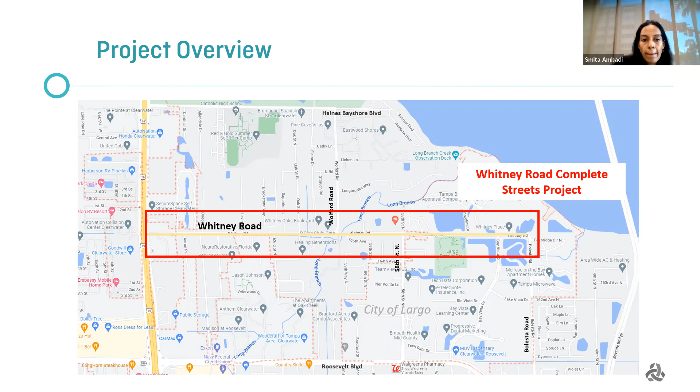There are a few ongoing projects within the study area. Can you move on to the next slide? So there are a few ongoing projects. We have the Duke Energy Trail project that intersects Whitney Road.

We also have the Whitney Road Wolford Road intersection improvements project. Both of these projects are being led by Pinellas County's Public Works Department. The Wolford Road project extends from North Oak Street to Hidden Springs. This project precedes ours, so it started a while ago, and we've already completed the public outreach and identified improvements for this stretch. Since this project is ahead of us and the improvements have already been identified, for the purpose of our project we will be focusing on the rest of the corridor, basically west of North Oak Street and east of Hidden Springs.

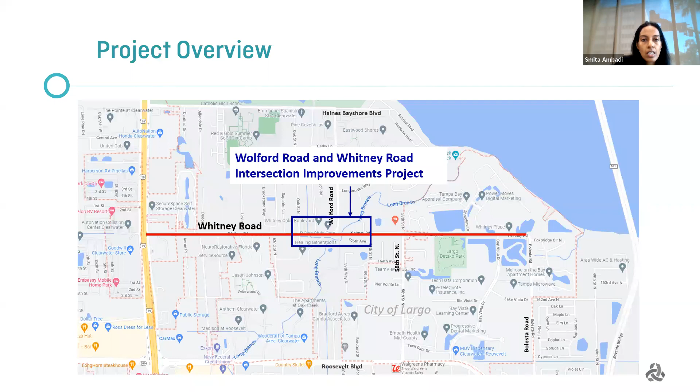All right, so Whitney Road, the intent of our project, the Whitney Road Complete Street project, is to identify multimodal improvements for Whitney Road, which means identifying improvements that will improve safety and comfort for pedestrians, bicyclists, and people who drive on Whitney Road. This is not a road widening project. The improvements we identify will be based on the right of way that we know as of today.

Also, the timeframe for the project ends in June. So by the end of June, our intent is to develop concept drawings, not engineering drawings. We'll be developing concepts for improvement, which will then help us advance towards engineering drawings. However, the development of engineering drawings would happen beyond the scope of this project.

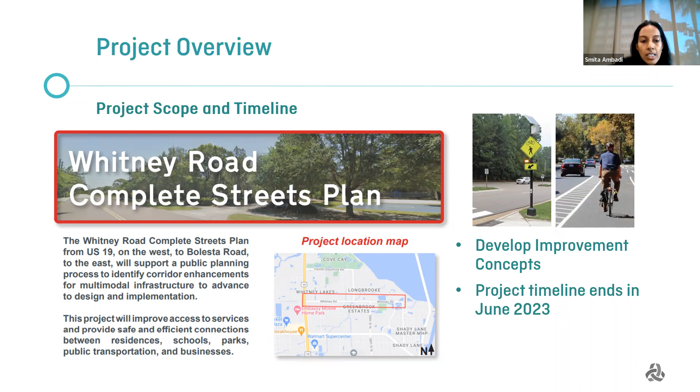A few more things. This project was made possible through a complete street grant that we received from Forward Pinellas. Also, as you know, Whitney Road crosses more than one jurisdiction. Therefore, this project is a collaborative effort between Pinellas County and the city of Largo.

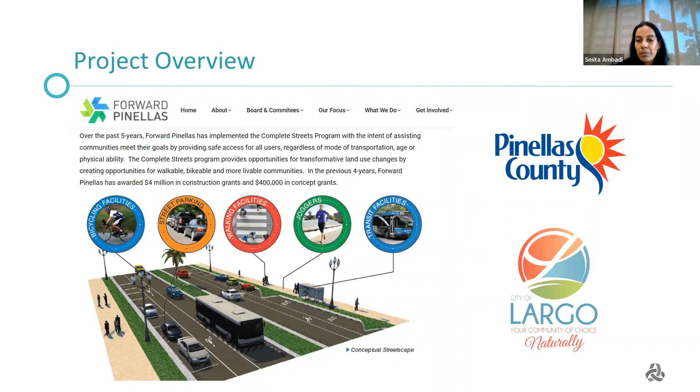I think that brings me to the end of my part of the presentation. So I'll hand it over to Amanda, who will walk you through the steps that we have completed so far and the steps that led us to the concepts that we'd be discussing with you today. So thank you.

And I realized I was on mute, so now we'll jump into where we're at with this project. There have been a couple ongoing efforts since we initiated this over the last couple of months. There was an online survey where we gathered key concerns from residents and business owners in the area, and with that survey, we received over 250 responses. So thank you if you did fill out that survey.

In conjunction with the online survey, we had an online wiki map. For those of you not aware of what the wiki map is or did not get a chance to complete it, this is an online mapping tool that lets you pinpoint exact places where you have a concern or issue, and we will provide this link at the end. The wiki map will remain open for the duration of this project, through June 2023, as another place to capture and take a look at feedback that other folks have been providing.

In addition to these two items, on our side with our team, we completed an existing conditions data analysis, really diving deep into different data sets to look at who lives here, who works here, what are the travel patterns, what are the main destinations and origins within the area. In addition, I'm not sure if you guys saw us, but we were out there one day completing a walking audit. Our full team went out to the corridor, walked it all the way up and down from US 19 to Bolesta Road, just so we could get a better feel and understanding of the corridor.

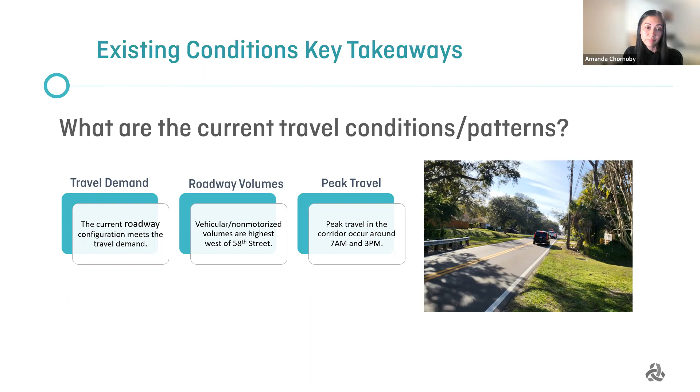Based off the surveys and feedback we received, many of the roadway users that utilize this corridor live within 2 miles of Whitney Road, which shows there is a potential to shift some automobile trips to multimodal trips, so walking or biking. Largo, Datsco Park, and the retail places along US 19 are some of the major key destinations within the corridor.

We also took a look at crash analysis data from 2018 through 2022 - it's typical to review crash data over a 5-year period. On Whitney Road, within that period, there were 48 crashes, 0 fatal crashes, and 1 severe injury crash. The most prevalent type of crash was rear end crashes, followed by hitting fixed objects, then side swipes. During this analysis period, there were also 3 bicycle crashes and 0 pedestrian crashes.

Getting into what we observed and some of the comments we received - depending on the modes of traffic, while data analysis comes from things like Bluetooth tracking on phones, the survey of people who filled it out gave us a couple different responses. Drivers tend to travel the western end of Whitney Road. Pedestrians travel more so the area between the future Pinellas Trail and the Wolford Road section, kind of in the middle. And bicyclists uniformly use the corridor.

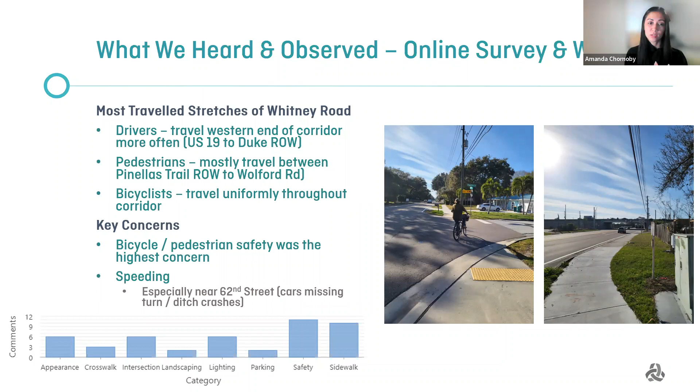Some of the key concerns were bicycle and pedestrian safety and speeding, especially near 62nd Street. The bar chart on the bottom is an overall tally of the different items we heard comments on, and how many times we heard comments fitting into these categories - appearance, aesthetics, crosswalks, intersections, landscaping, lighting, parking, and the 2 on the right, safety and sidewalks.

These were some of the improvements that people suggested and shared. We had comments saying maybe there should be more speed limit signs, more additional police enforcement. There were suggestions for potentially a buffered or continuous sidewalk, bicycle lanes, restoring right turn lanes from the frontage road onto Whitney Road, crosswalks, potential flashing pedestrian beacons, and a median.

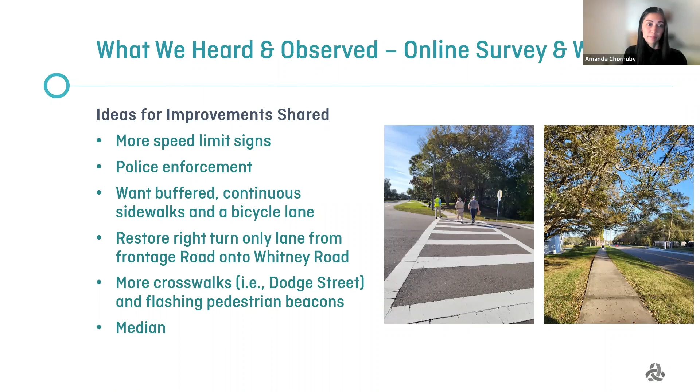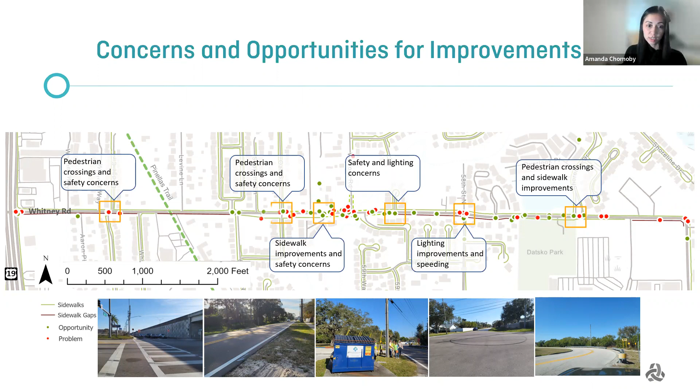We did want to address that. We talked about it earlier, but overlaying the Whitney Road and Wolford Road intersection improvement shows that project will address the majority of the concerns identified in that area. A couple slides down, Frank will get into some of the specifics of the Wolford Road project.

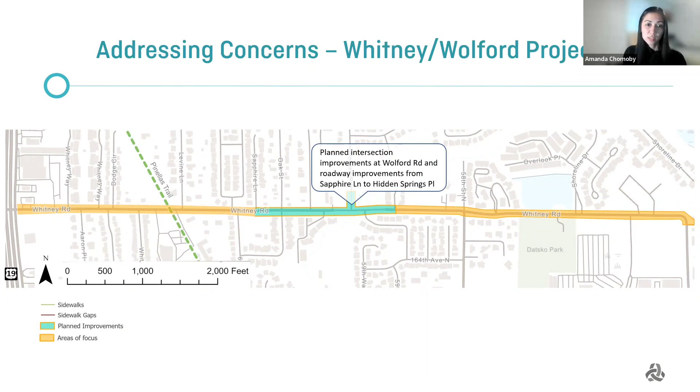As mentioned, we do have Scott on the line, so if you have any specific questions he can answer those via chat, or we'll give you his email so you can reach out to him directly. With that, I'll hand it over to Frank to talk about our potential concepts for Whitney Road.

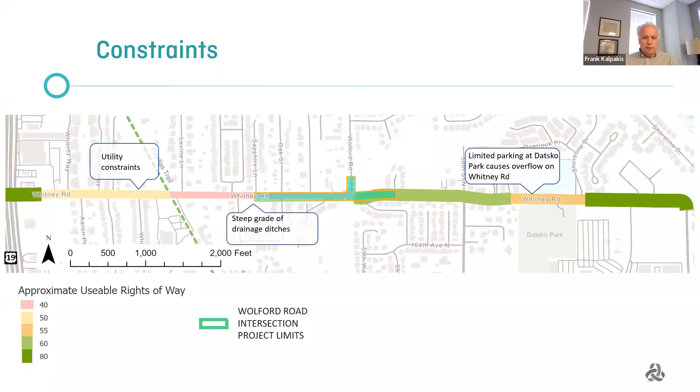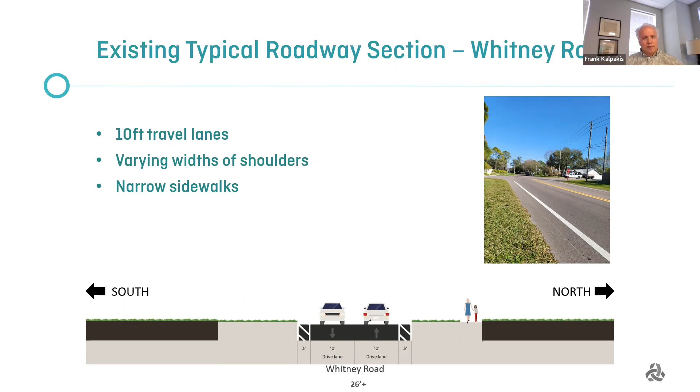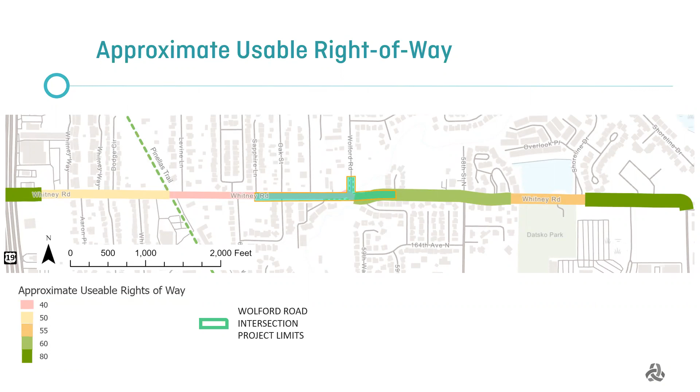We had one question in the chat about Long Branch Creek. Is that what you were addressing in the chat, Scott? Yes, I responded to that, and I think that was Taylor. Taylor, if you have any additional questions, email me and I'll get you all the information.

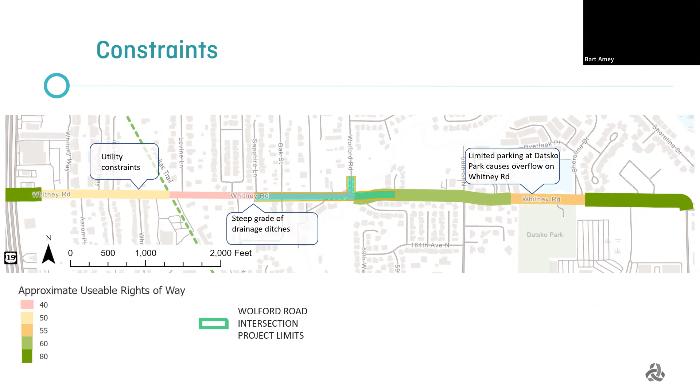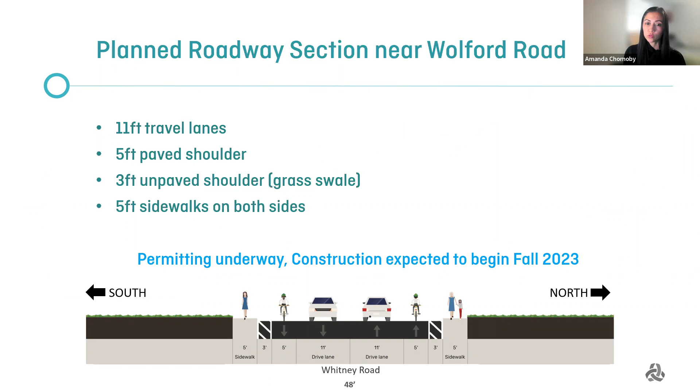Can we review just briefly concepts A, B, C, and D, just a quick run through? Yeah, we can run through them again just visually, and then when we get to the voting portion, I'll have some little hints to remind you of what you're actually voting for. Let's go to that again.

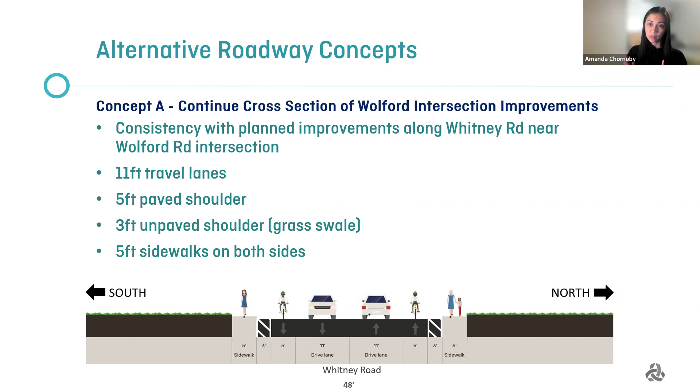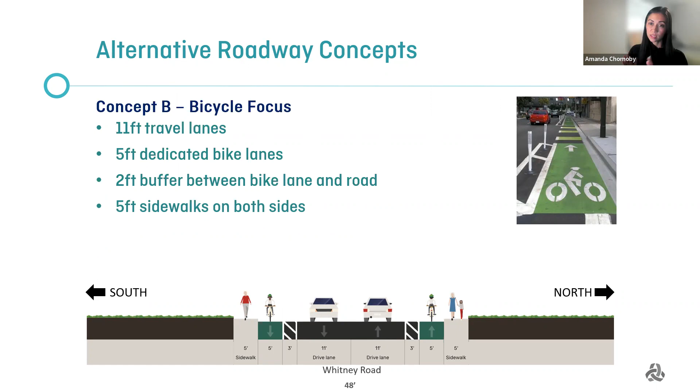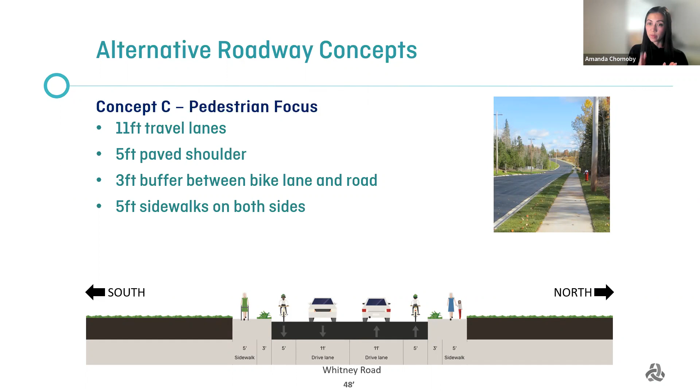This is the continuation of the planned Wolford Road intersection improvements. This one has dual paved shoulders that can be used for bicyclists, as well as a 5-foot sidewalk on both sides. Concept B is more bike focused, giving a dedicated bike lane with a buffer between the travel lanes and the bicycle lanes. Concept C gives you a buffer between the sidewalk and the paved shoulders where the bicycle can utilize.

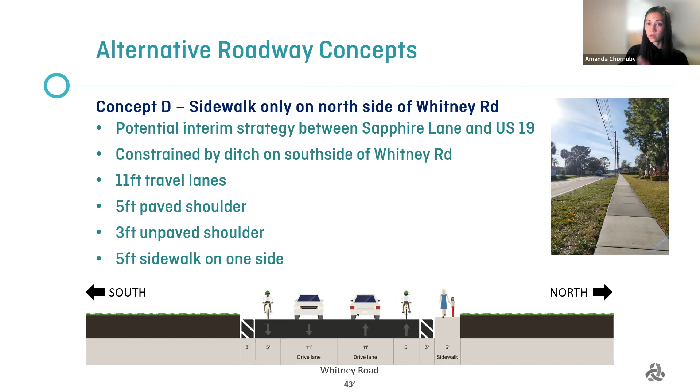And then, like we said, concept D is an interim strategy. So if this is something that you're good with between Sapphire and US 19, and you think this is a good option in the interim, just let us know in the chat or verbally. We can keep talking through these if you need more clarification, but I do want to move on to the polling.

This is an online polling tool that we use called Poll Everywhere. There are two ways that you can respond to this poll. If you're on your laptop or a tablet, you can go to pollev.com/truetrain007. Chase, maybe you can write that in the chat and drop that in there for folks.

Or if you want to respond with your cell phone, which is usually the easier option, you can text the number 22333 with the word True Train 007, no space. Once you do that, you will get a message that says, hey, you're in this survey. It might say like Caroline or Amanda survey. At that point, you can type in the letter A, B, C, or D.

Can you go over that again, please? And again, if you have any issues using the website or the texting, we can go old school, just drop your A, B, C, D into the chat and we'll collect it that way. We want to offer a variety of options to gather feedback from you all.

Can you repeat those instructions one more time, Amanda? Yes, thank you. If you are viewing the screen, they're also at the top there. So from the website, you can go to pollev.com/truetrain007, so 007, and that'll take you to the website.

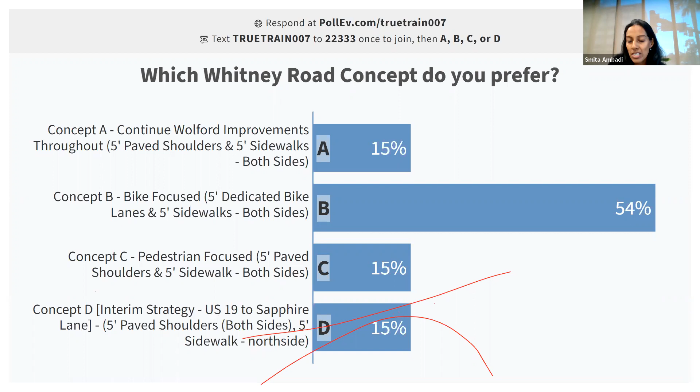Jill has left a message saying that I didn't vote, I need more time on the visuals. That's totally fine, Jill. If you need a copy of the presentation, I can send it to you if you need time to review it and think about it, and then let us know. That's also fine.

Okay, it looks like the votes are slowing down. And if you did not get a chance to drop this in again, I will have one more opportunity for you all to provide feedback to us, and you can also do so in the chat at any time.

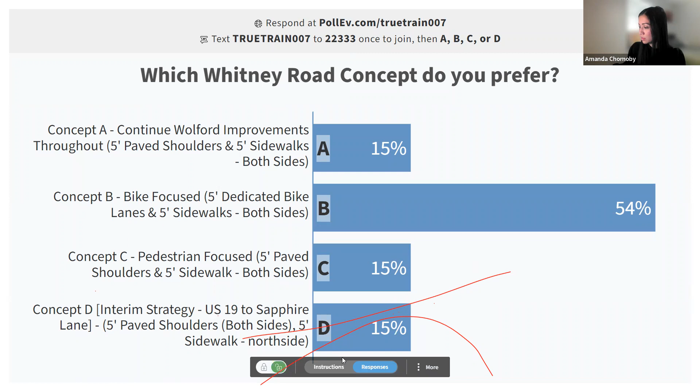Okay, just some other items we wanted to cover. Just making sure that what we've discussed, we realize that the Wolford Road intersection was started before this Whitney Road Complete Streets project. So we're being mindful of coordinating with that team and ensuring the project elements they are proposing align with the concepts we are proposing. Frank already talked about this, but again, just other things to consider.

The future filling in of the ditches will obviously provide more usable right of way that could provide more sidewalks on the south side. So that's a consideration we just want to be aware of.

Just kind of brainstorming ways we could address some of the issues with Datsko Park and the parking overflow. We realize that parking lot is a bit constrained. It can get very busy, especially in the afternoons when people are playing basketball and doing other things, or walking at the park. We noticed there's a lot of cars that park along the right of way. So one of the things we wanted to explore, that wouldn't necessarily require building more infrastructure or capacity, is maybe there's a potential for a shared parking lot agreement with Tech Data, since they do have that large parking lot. Again, no discussions have been made at this time, but just wanted to explore something and brainstorm some ideas.